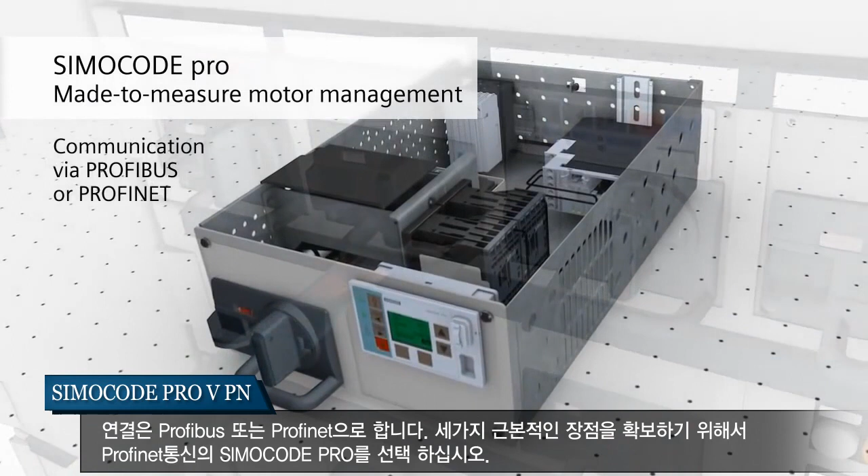Another strength of the system is its communication capability. Simocode Pro transfers operating, service, or diagnostics data from the motors to higher-level systems, thus increasing plant availability. Connection is via either Profibus or Profinet. Make your choice for Simocode Pro for Profinet to secure 3 substantial advantages.

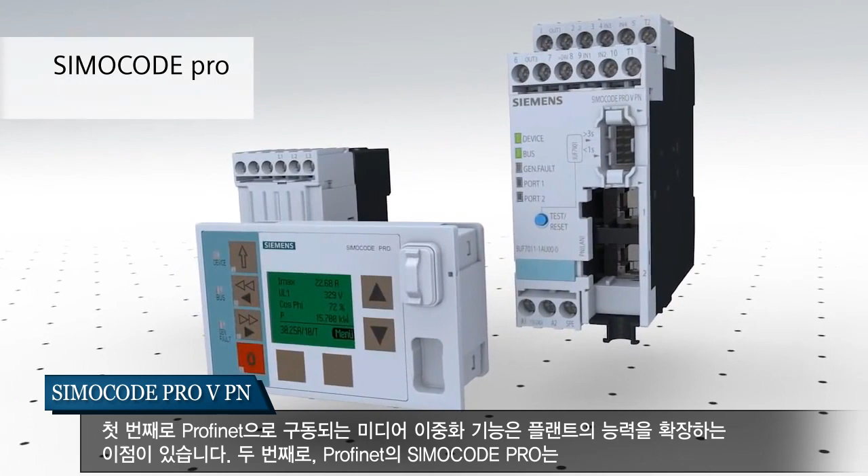Firstly, you profit from enhanced plant availability thanks to the media redundancy functionality that can be implemented via Profinet. Secondly, Simocode Pro for Profinet supports you with Profi Energy functions for managing your energy. In this way, you can keep a closer eye on consumption and costs in your process.

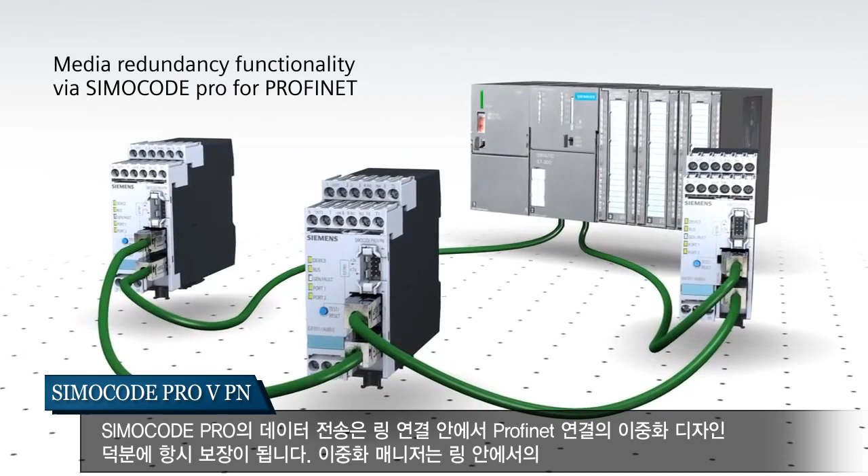Simocode Pro's data transfer is guaranteed at all times, thanks to the redundant design of the Profinet connection in a ring topology. The Redundancy Manager continuously checks the data flow in the ring. If the connection is interrupted, it ensures that the data reaches its destination. Both ports are then used, and the data is sent on an alternative path in the other direction. So plant operation is not endangered, even in the event of a communication fault.

As well as security and reliability, energy saving is a core issue for you as a plant operator. To support you here, Simocode Pro for Profinet provides the standardized Profi Energy transmission profile. You can use this option for your energy management without additional devices, thus saving power and so reducing your costs thanks to efficient motor control.

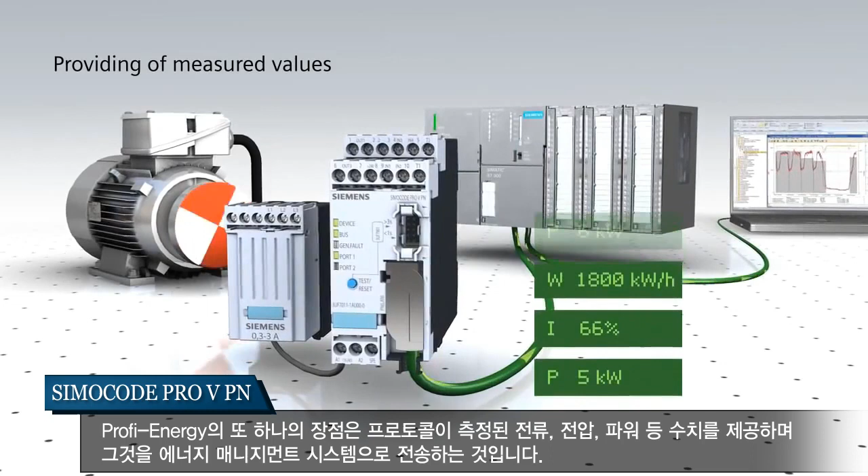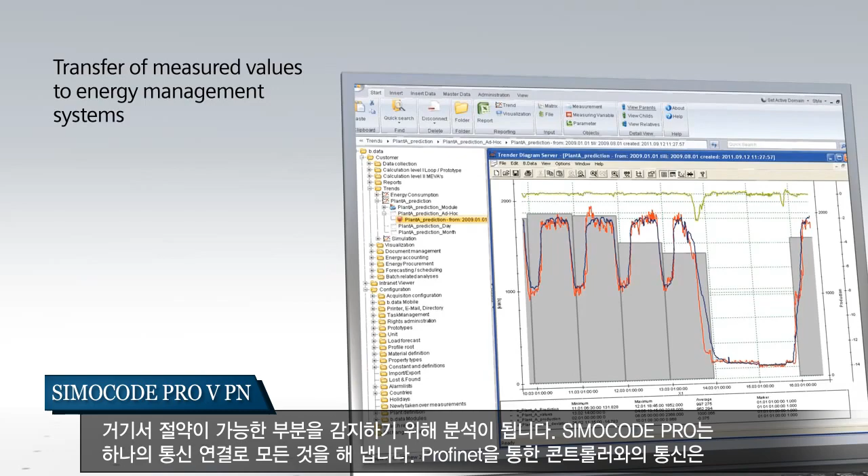An important standard function here is the pause circuit. If a motor is not required, it is switched off for a specific time. A further benefit of Simocode Pro and Profi Energy: the protocol provides measured values such as current, voltage, or power and transfers them to energy management systems. There, they can be analyzed to detect potential savings.

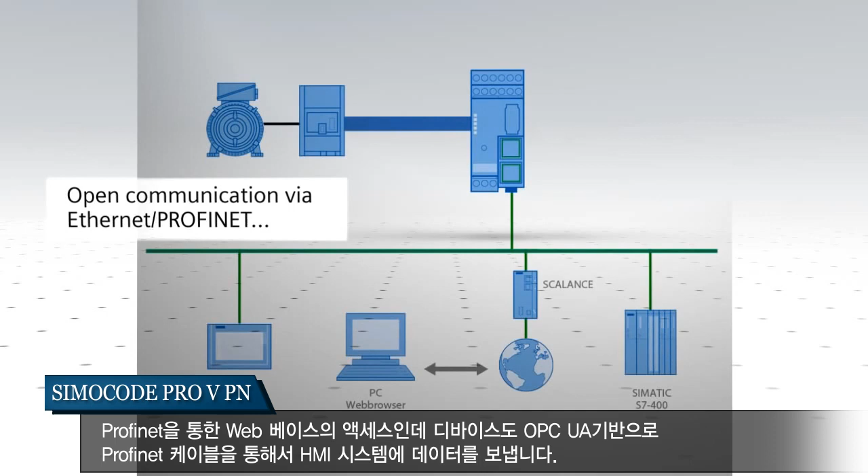Simocode Pro does everything on a single communication link. Communication with the controller runs over Profinet, web-based access runs over Profinet, and the device also transfers data to HMI systems over the Profinet cable on the basis of OPC Unified Architecture. This means you need only one network for everything, and you save on hardware and cabling overhead.

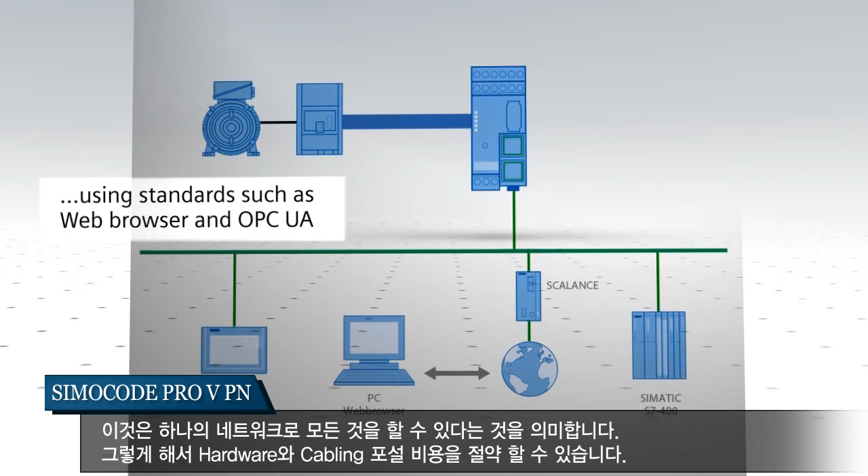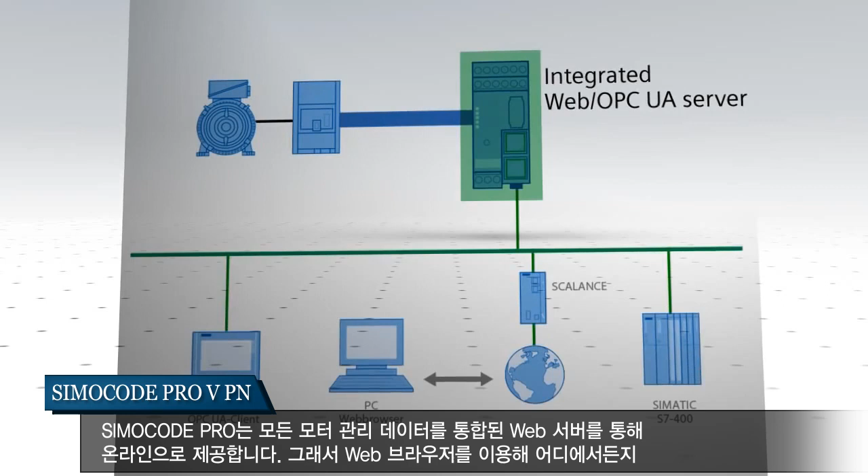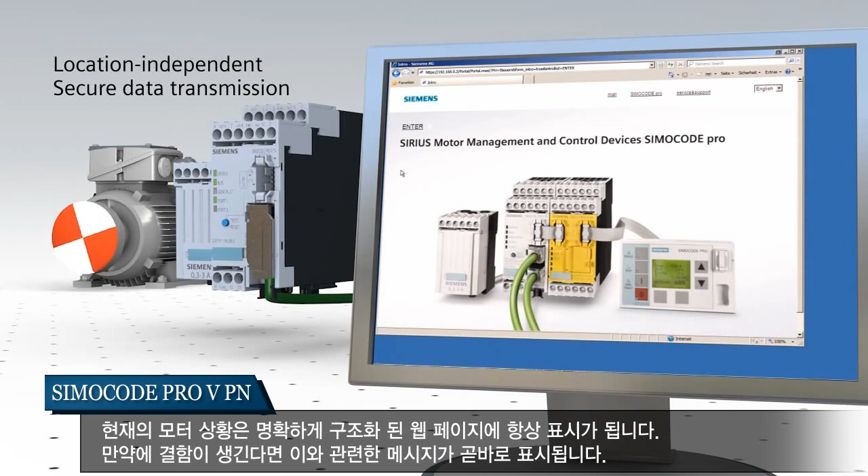Simocode Pro provides all the motor management data online via the integral web server. You can therefore access the diagnostics data simply and securely from any location using a web browser. The current motor statuses are displayed at all times on clearly structured web pages. If a fault occurs, the relevant messages are just a click away. For example, you may see at first glance that the thermistor indicates motor overheating.

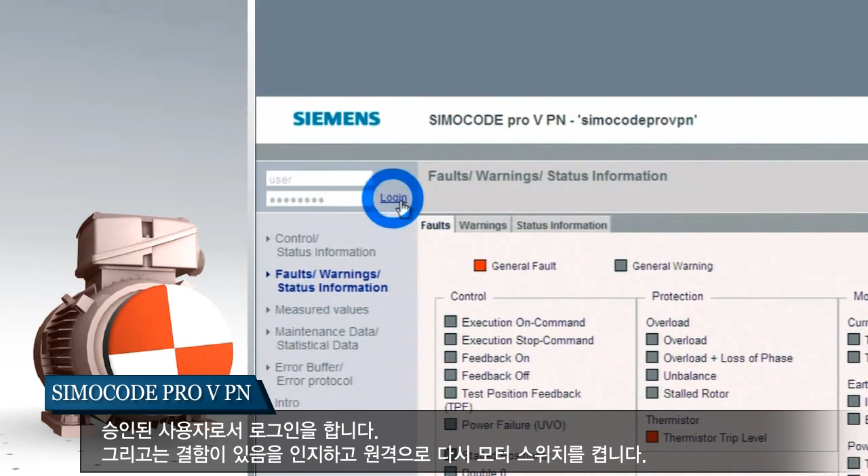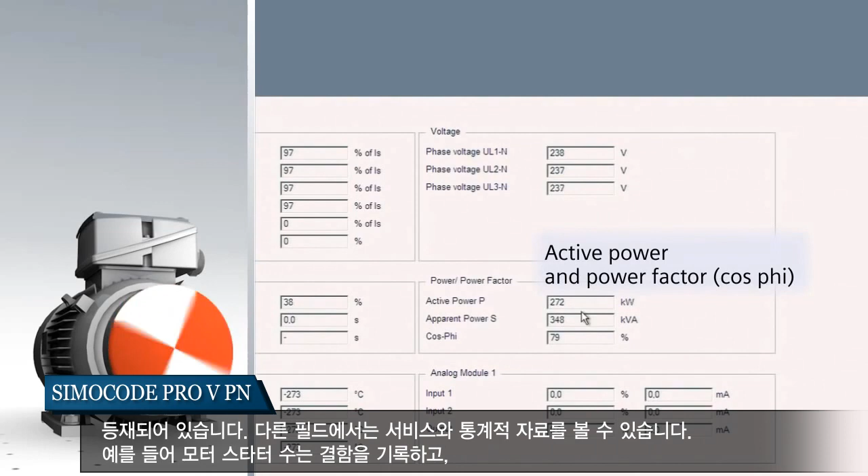To remove the cause of the fault, log into the Simocode Pro as an authorized user. Now you can acknowledge the fault and switch the motor on again remotely. In the browser view, you also have access to current measured values. Whether current, voltage, active power, or apparent power, all the important data of the motor feeder are clearly listed.

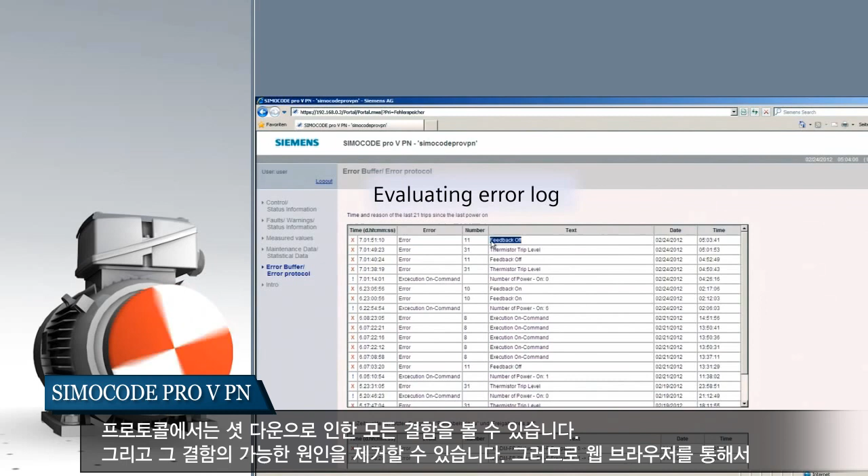In another field, you can also find service and statistics data. The number of motor starts, for example, is particularly relevant for service and maintenance purposes, as is the fault history. In the protocol, you can see all the faults that have resulted in a shutdown, and you can then remove possible causes. You therefore have all the monitoring and operator functions at your fingertips via the web browser, without the need for any additional software.

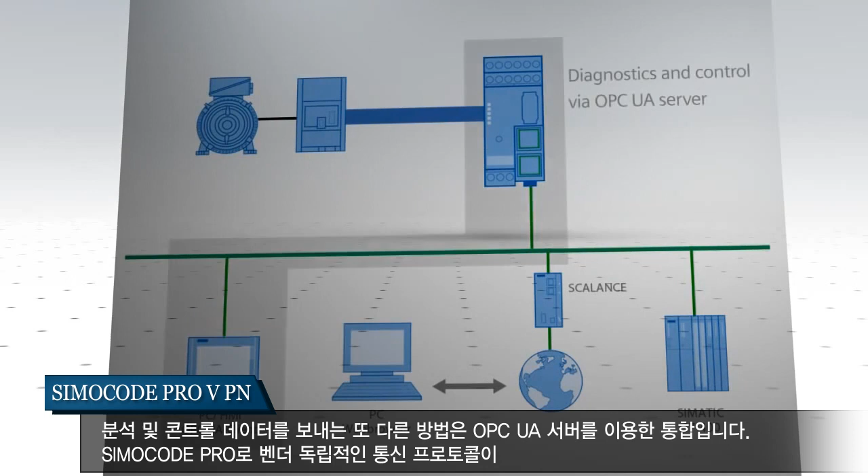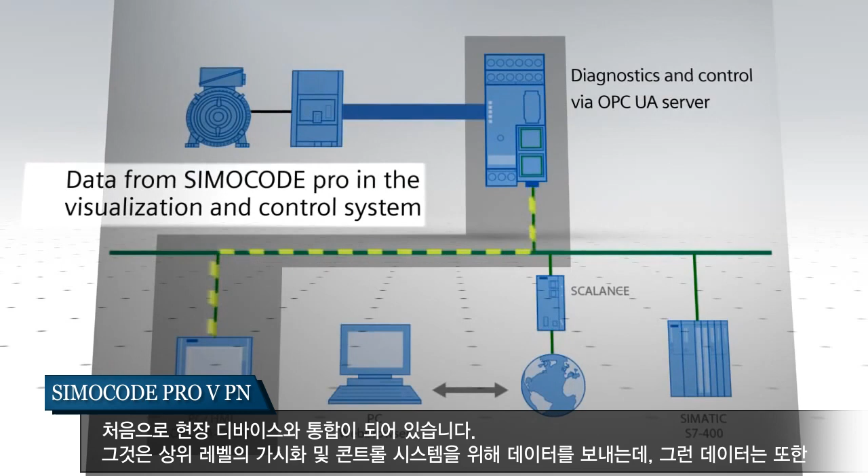Another method for transferring diagnostics and control data is the integral OPC UA server. With Simocode Pro, it is the first time a vendor-independent communication protocol has been integrated into a field device. It supplies data for higher-level visualization and control systems. These data can also be called up individually via local HMI systems where they are used. For example, for human-machine interfacing close to the switchgear, completely independently of the controller.

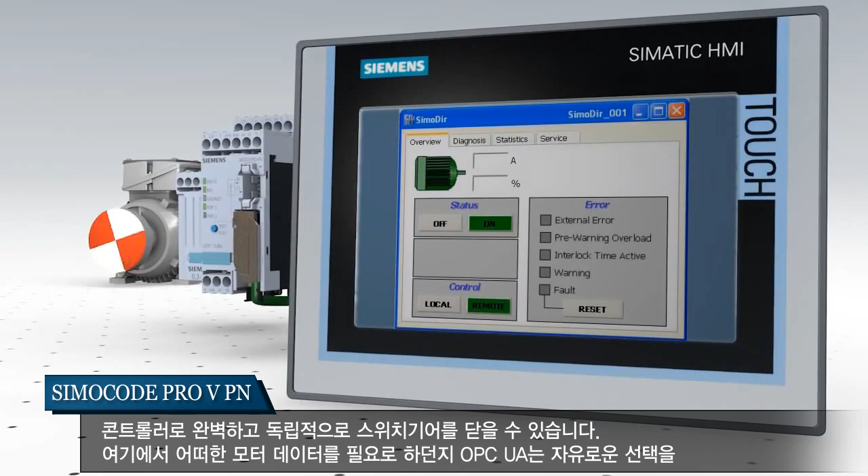Whatever motor data you require here, OPC UA gives you a free choice. Measured values, diagnostics data, current status information, and much more are made available via a secure connection and fully in accordance with your requirements. Using these data, you can set up the image objects of your operator interface dynamically.

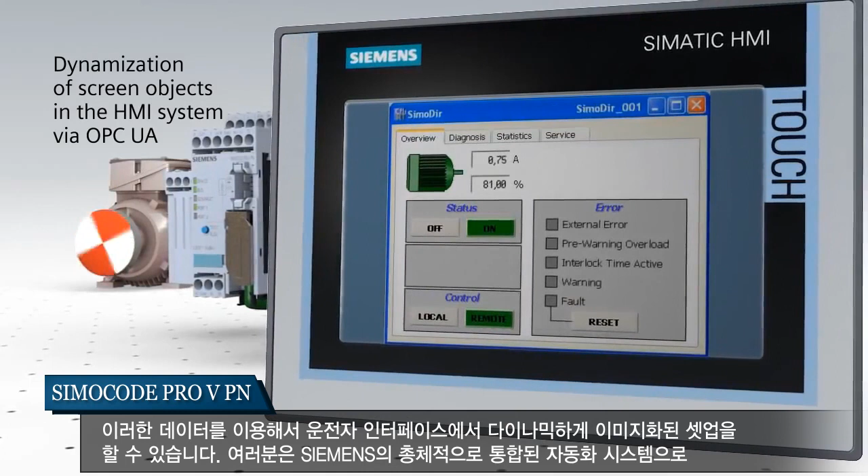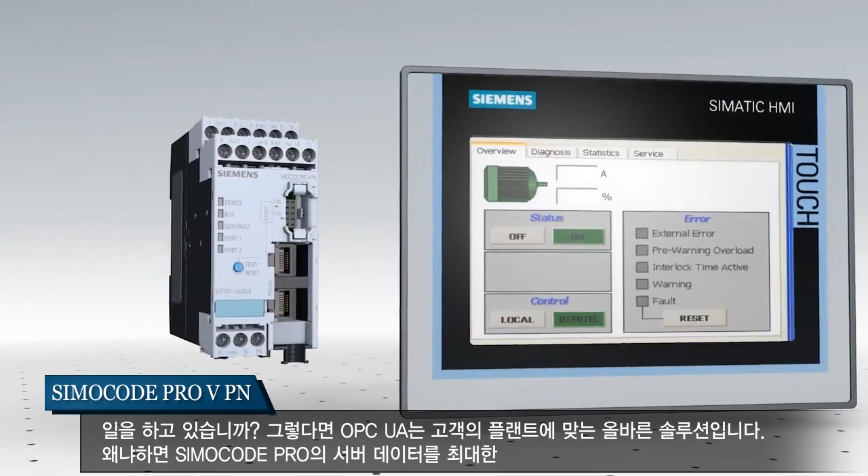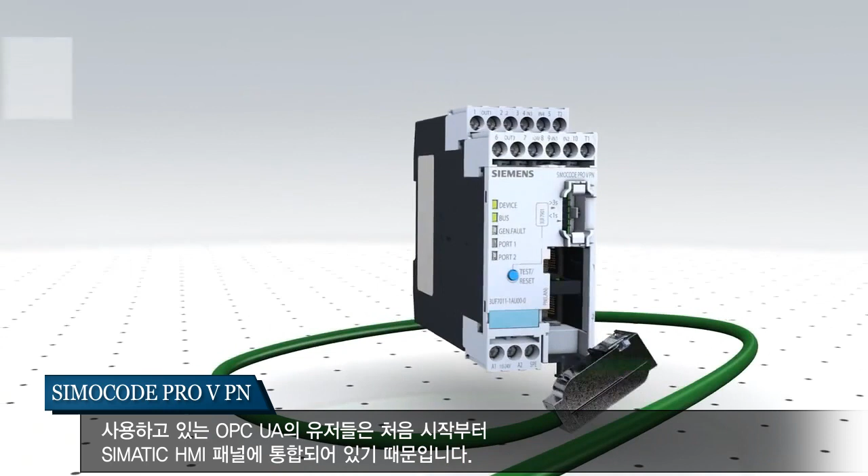Do you work with totally integrated automation from Siemens? Then OPC UA is the right solution for your plant. Because the OPC UA client that enables optimal use of the Simocode Pro server data is integrated into Simatic HMI panels right from the start. With Simocode Pro for Profinet, you profit from all the potential of industrial Ethernet for your motor management.